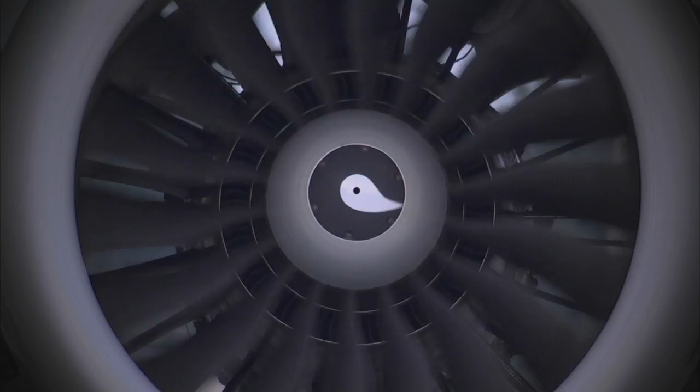The aircraft of today are quieter, more efficient and stronger than anyone could have imagined, even a few short years ago. Of course, future aircraft will continue this trend and become even more efficient and dependable, reaching unimaginable goals that today's aircraft could never reach.

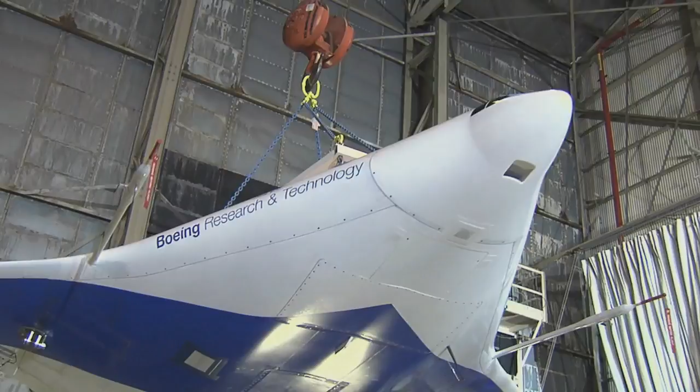But how will they reach these goals, and who is performing the important work to change the way we all fly? The common misconception is that most advances come strictly from major aircraft manufacturers. But the true story is much more complex. Unknown to most of the public is that one of the unsung leaders in aviation is NASA.

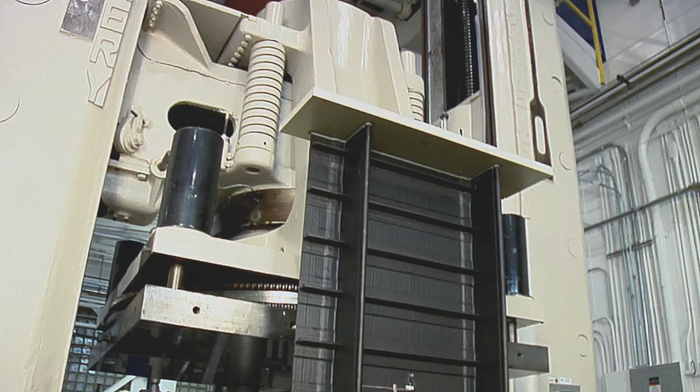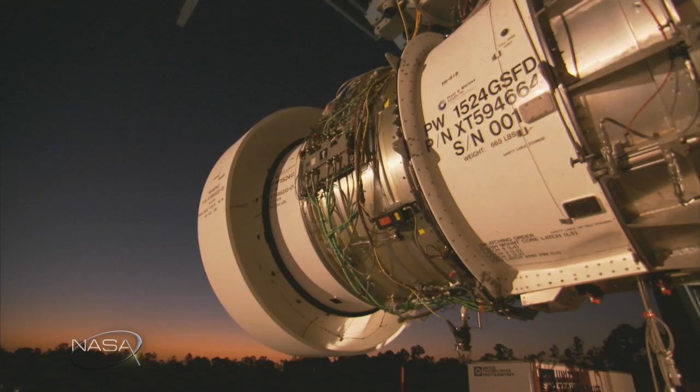NASA engineers work hand in hand with industry partners, developing and testing new designs to make aircraft safer, greener, and much more efficient. On this episode of NASA X, we will look at how this collaboration works, and we'll see how NASA and industry are paving the way for greener, safer aircraft for today and for aircraft of the future as well.

This is a familiar sight for modern travellers. Large metal jets roaring down the runway and lifting into the air. In fact, this sight really hasn't changed that much in the last 50 years or so. Other than the way most people dressed for flights back then, the basic concept of air travel is pretty much the same.

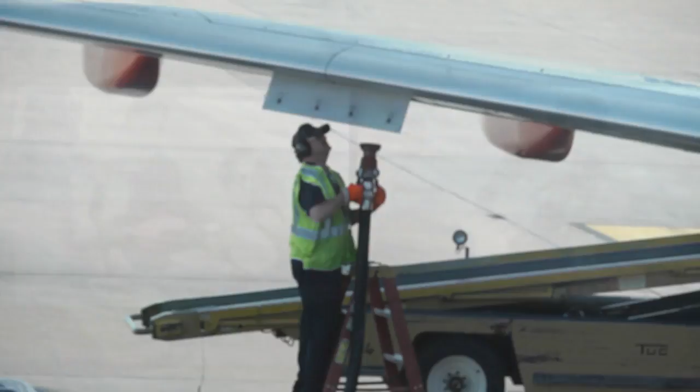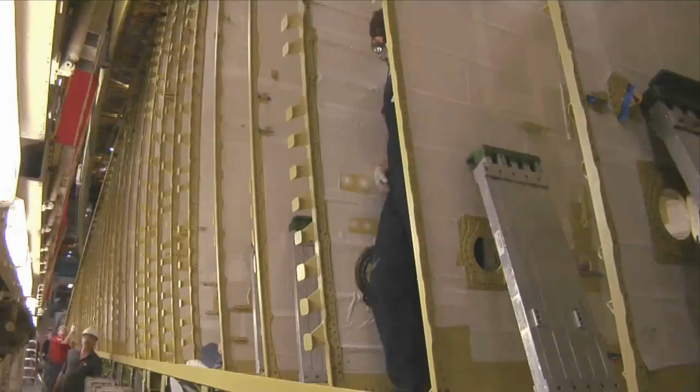There have, of course, been measurable differences in fuel economy, with new developments in engine design and noise reduction techniques. But the basic tube and wing shape and the material used to build these aircraft has remained pretty much the same for years. But that isn't the case anymore.

Like so many products that have evolved dramatically in the last few decades, like phones for example, the same is true for aircraft design. Today more than ever, researchers are pushing the boundaries of the science of flight in their effort to make aircraft of the future more efficient, quieter and greener. So who's taking the lead and why?

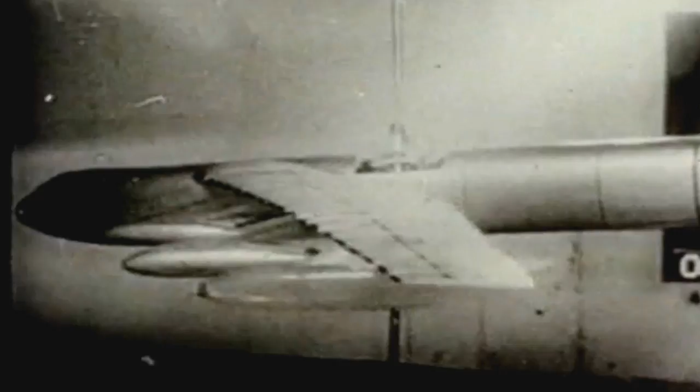Obviously industry is taking the lead in some areas because cleaner operations and more efficiency mean higher profits. But they're just not the only players. One of the leading innovators in aeronautics over the history of flight has been and continues to be NASA.

The push to modernise and change aircraft of the future is being led by NASA's Environmentally Responsible Aviation Project, or ERA. The ERA project is putting its money where its mouth is with tough but reachable goals to make big changes in how we fly by the year 2025.

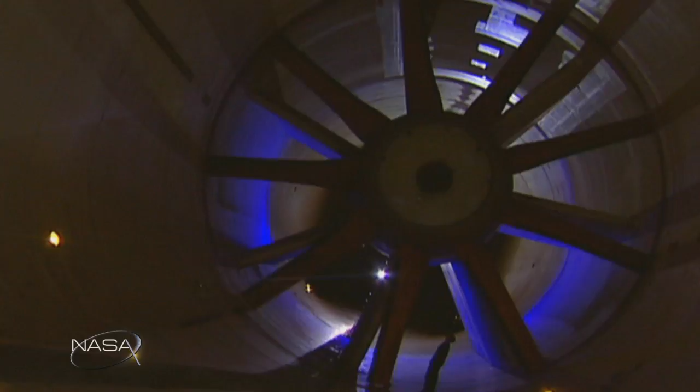So the Environmentally Responsible Aviation Project is a 5-year, 6-year project, and it's focused on advanced aircraft design and the technologies that are needed to enable them. The main goal of the project is to reduce noise, to reduce mission fuel burn, and to reduce LTO NOx emissions. And LTO stands for landing takeoff, oxides of nitrogen emissions.

And we want to do that simultaneously, and that's never been done before, where we looked at some very difficult metrics and tried to push all of those metrics down simultaneously. And so over this 5 or 6 years, we'll be looking at technologies, we'll be looking at aircraft designs and the combination of those to end up with a configuration that could simultaneously attack these goals.

So how do you make these goals a reality? The 4 basic principles of flight are lift, drag, weight, and thrust. Finding efficiency in each of these basic principles will help reach NASA's stated goals. Let's look at weight first. Obviously, if you can reduce the weight of an aircraft, then you will burn less fuel and therefore become more efficient. Airlines are always looking for ways to carry less weight.

You can see that in extra baggage fees, reduction of heavy items such as ovens and heavy carts on some planes. And in one of the most drastic measures taken in recent years, some airlines have begun asking passengers to use the bathroom in the terminal before getting on the plane, making the passengers a little lighter.

In a 1-month experiment, an airline found that they reduced greenhouse gas by 5 tons simply by asking passengers to use the loo ahead of time. This proves that even small changes in the weight of an aircraft can add up to big long-term benefits. The holy grail, of course, is to make the entire aircraft structure lighter.

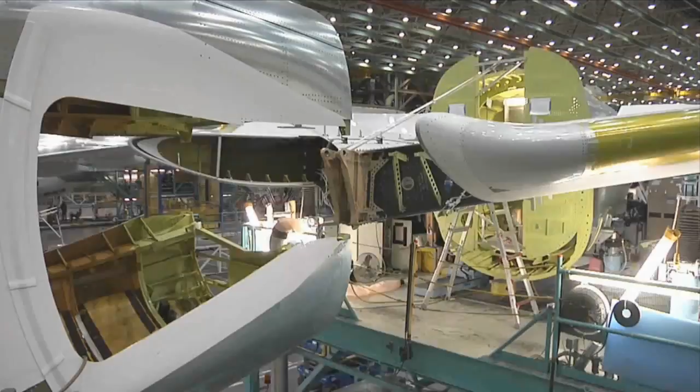So how can this be done? Today's aircraft are made out of metals that are safe, but that are also very heavy. So is there an alternative? In recent decades, NASA and its industry partners have been working hard developing new materials that could bring aircraft out of the 20th century and into the future.

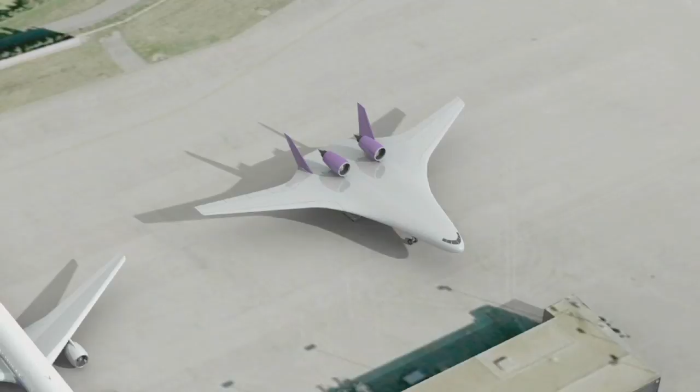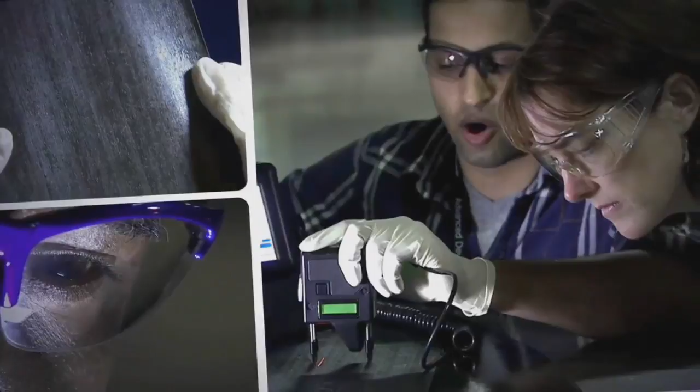New composite materials are leading the charge to replace conventional metals. Aircraft designers are taking advantage of composite materials' lightweight, strength, and flexibility. Aircraft designers have long known about these qualities and have been using something called carbon epoxy composite materials in small quantities for decades.

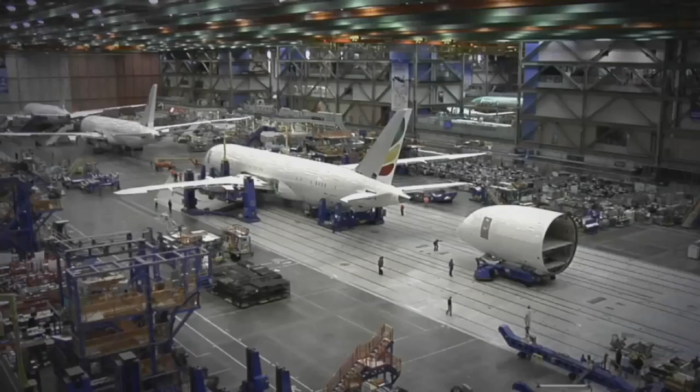After years of research and validation of composites for flight, the Boeing company was the first to step up and build an aircraft almost completely out of composite materials. Called the 787, this next-generation aircraft first came into service in October of 2011. As the first official commercial flight of the 787 took off from Tokyo that year, it was clear that this concept of an all-composite aircraft was here to stay.

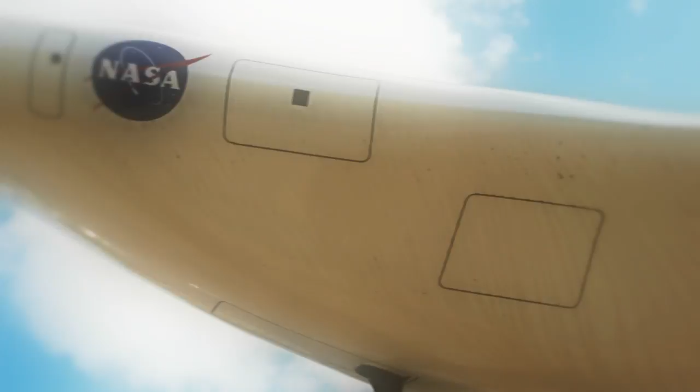NASA is not in the business of building aircraft, but they are in the business of helping lead development programs to move the science of flight along. Once validation and testing in the development process is complete, NASA shares its findings with industry in an attempt to help further research and development.

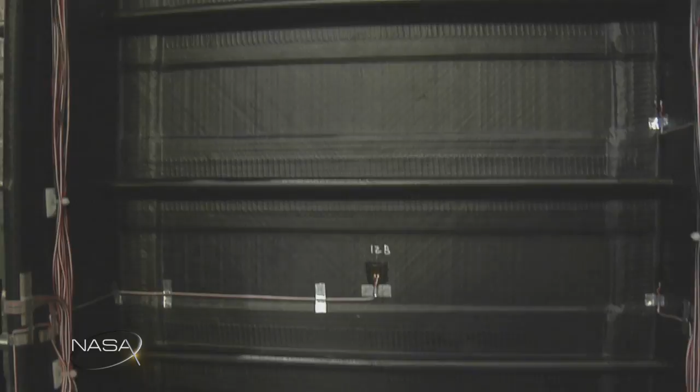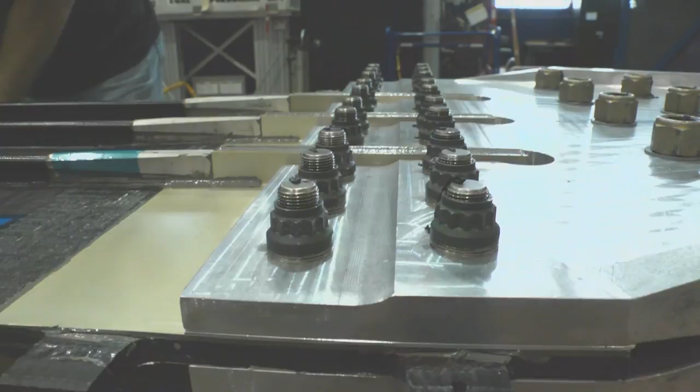One of the programs in which NASA is working with industry is in the development of new composite materials for aircraft. Here in the Structures and Materials Lab in Building 1148 at NASA Langley Research Center, much of the development of next-generation composites for use in aircraft is taking shape. Called PRSEUS, this new idea has the potential to completely rewrite how composites for use in aircraft are made.

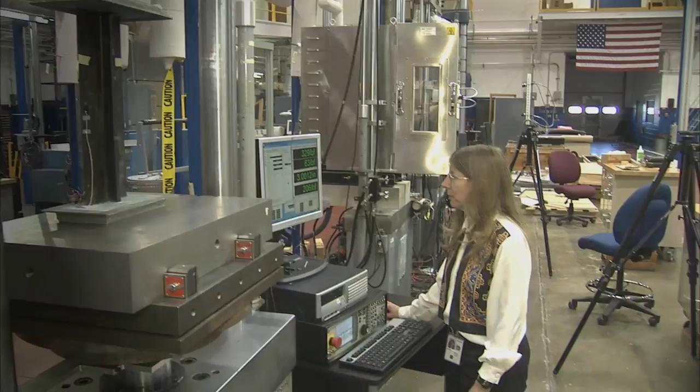Leading much of the research for NASA's Environmentally Responsible Aviation program in the composite field is NASA Langley's Dawn Jegley. This MIT grad has been working with these materials for decades and has a keen understanding of what needs to be done to make these composites of the future fly.

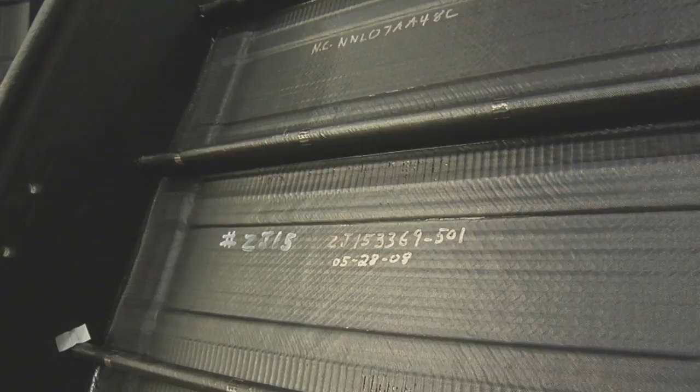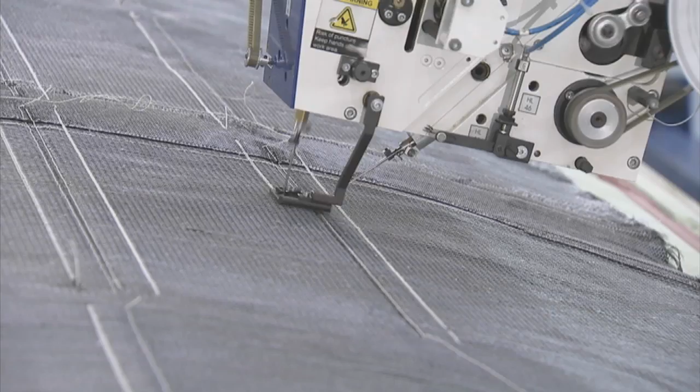PRSEUS stands for Pultruded Rod Stitched Efficient Unitized Structure. And what that means is that we have a graphite epoxy or a carbon epoxy structure, and what we have is pultruded rods inside carbon layers. We have a carbon skin, and we have stitches that run through the thickness that holds the whole thing together. One of the huge benefits associated with PRSEUS is its revolutionary stitching technique.

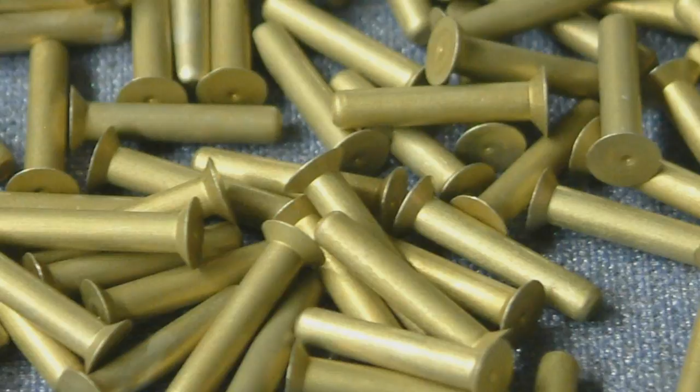On current metal and composite aircraft, one of the key components used to hold the vehicle together are the fasteners, like rivets or bolts. Although these are effective, one major drawback is that quite a few holes have to be drilled into each piece where the fasteners will be added. Not only is that labour intensive, but each hole represents a place where damage or a crack could start. But the stitching prevents that from happening.

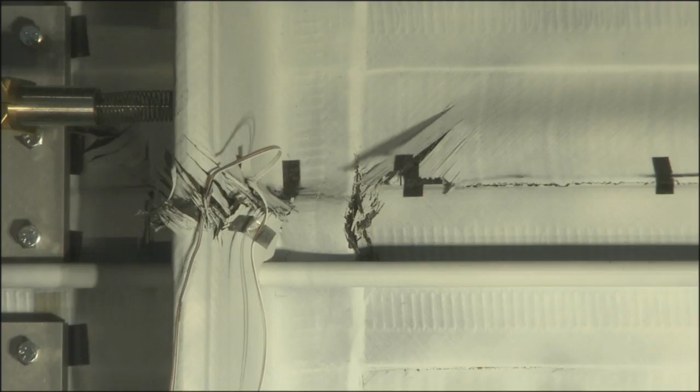We found that if you have a crack and it grows to a certain point and it gets to some place that it's stitched, that crack will turn. So instead of going through the stitching, it will turn, and that's a good thing because in flight you would rather not have a crack grow all the way around a wing.

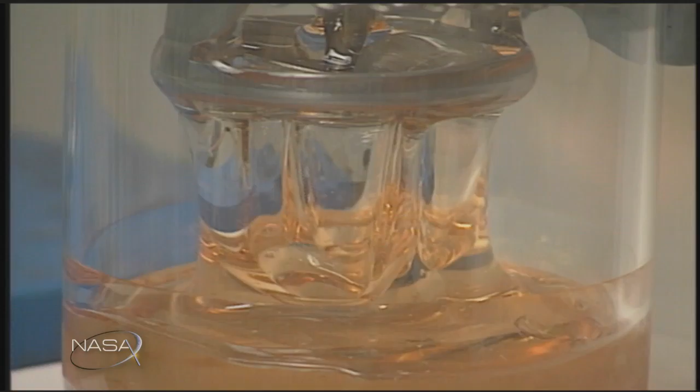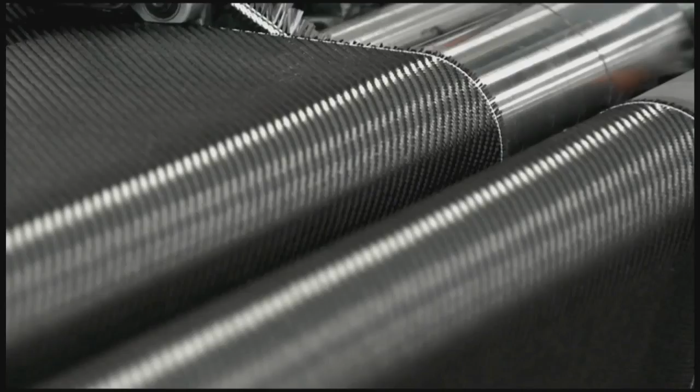When you look at a piece of carbon epoxy composite material, it honestly doesn't look very strong in its raw form. But once it is in its final state, it can be much stronger than metals. You start out with a fabric. It looks kind of like carpeting. And you roll that out into the shape that you're looking for, and you position all the different parts of your structure where you want them, and then you come through with a stitching machine.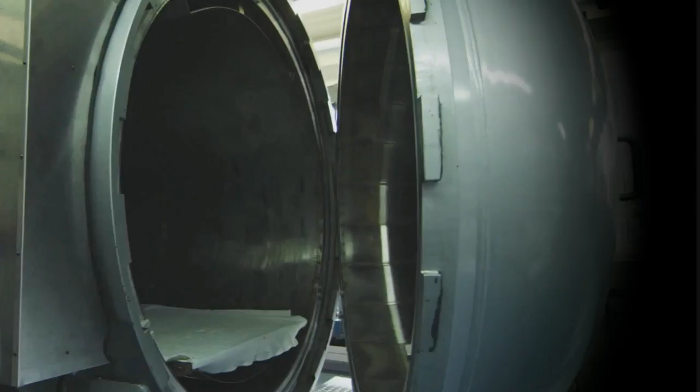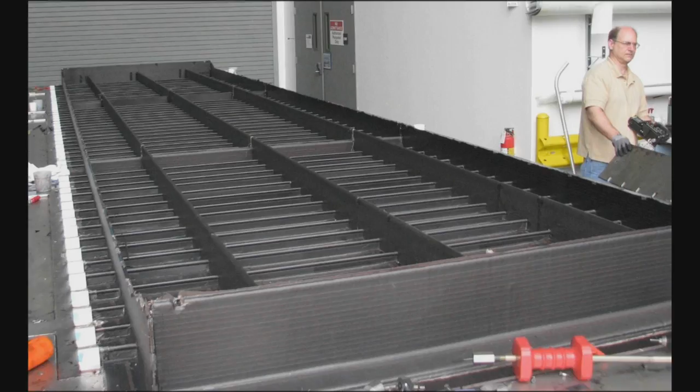After you've stitched the whole thing together, the panel goes into an oven. It's infused with epoxy. We heat it up, and then we get everything just the way we want it, and then we cool the structure. So what happens is you end up with a piece of material, could be a very large piece of material, which is now stiff and strong and just in the right shape that you want it.

Another key component to carbon epoxy composite materials is that they can be tailored to be much stronger than metal. At the molecular level, the properties of metal are isotropic, which means that the properties all run in the same direction. Because of this feature, aircraft designs are very bulky in some areas to provide stiffness, making a craft much heavier. But with composites, you are starting with fibers which are very strong, tough threads, and you can position those threads in any direction you want.

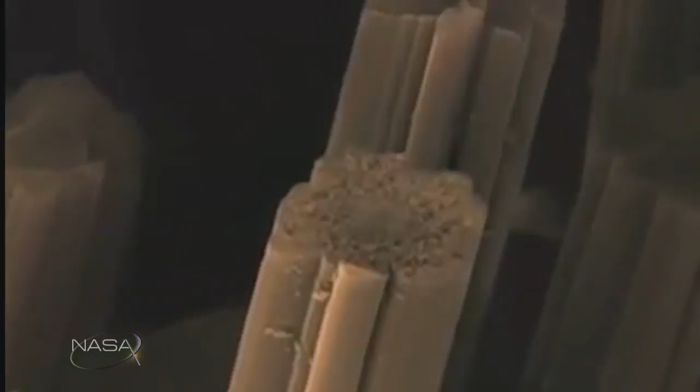For example, if there is an area on the aircraft that takes a lot of load, the designers can place the fibers in that direction, providing enormous strength, but while also using much less material and weight than metal aircraft.

Of course, validating that the pieces will work is a major component of the development stage. So I know that NASA really does some great testing of its materials before they go onto any aircraft. How are you testing PRSEUS at the moment?

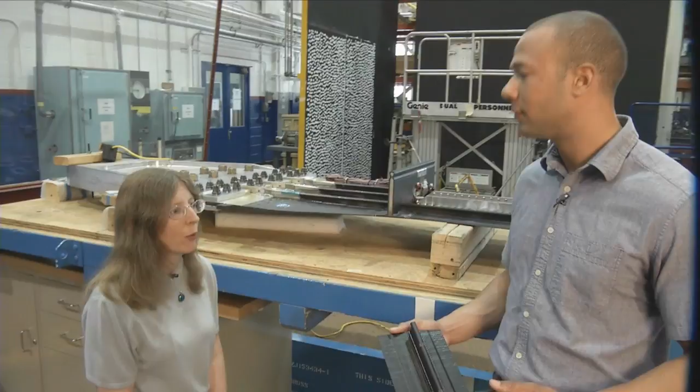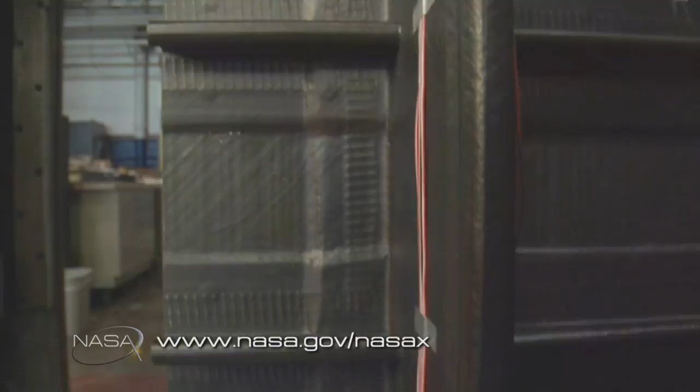One of NASA's goals is to develop technology for future aircraft. When we're developing a new structure, one of the things we need to do is fully understand how it's going to behave. And to do that, we start by looking at very small pieces, and then we move up slowly to very large pieces until we get to a full-scale part of an aircraft.

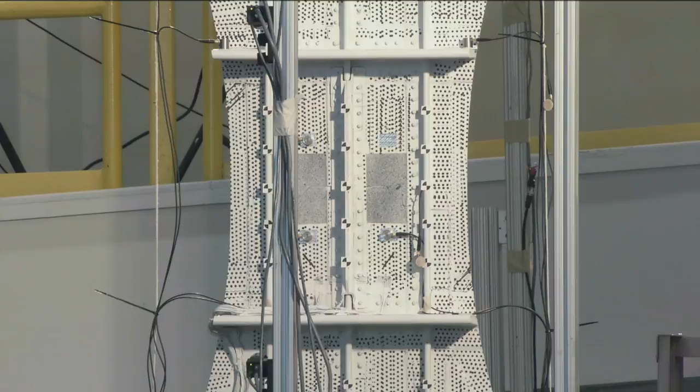And then when we understand that, we go to the next stage, which might be something more like this, where we have what we call a built-up structure. So we have a skin, and then we have a stiffener on it. And then we can apply a load. We might push on it, we might pull on it, we might bend it to look at how that behaves.

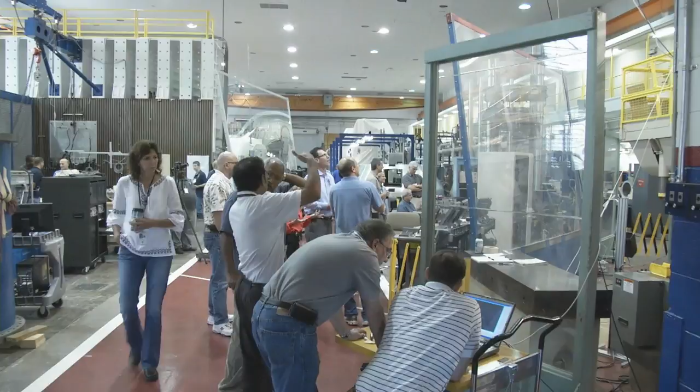And all the while we're doing this, we're doing analytical studies to make sure we understand and can predict how it's going to behave. Because if we don't predict it properly, then we feel we don't really understand it well enough, and we have to take a step back and figure out what it is we're missing. We have many facilities around the center here that we use for doing those kind of tests.

Well, Dawn, thanks so much for talking to us today about PRSEUS. This looks like an amazing technology, and you're doing a fantastic job. Thank you so much. Thank you.

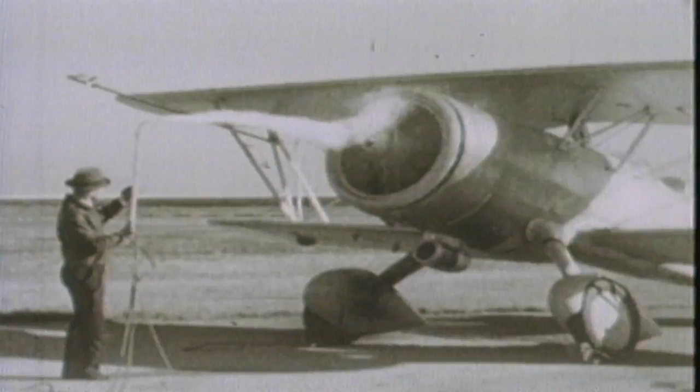Up next, let's look at another of the basic principles of flight: thrust. Since the earliest days of flight, engineers have looked for ways to make the engines we use on aircraft more powerful and efficient. One of the most important early engines was the 1903 Wright brothers design that was used for their very first flight at Kitty Hawk. It only produced about 12 horsepower, but it opened the door for all aircraft engines to come.

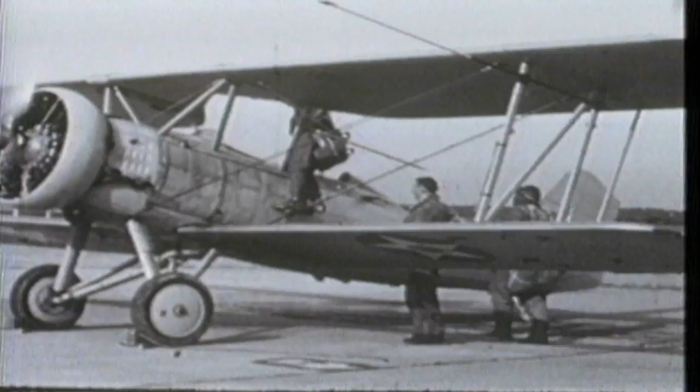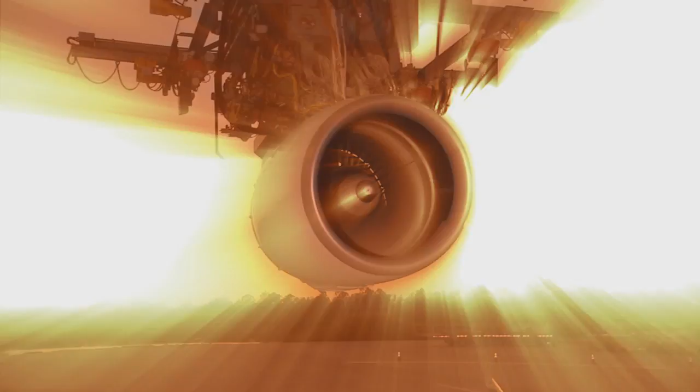Since that time, there has been a steady progression in the development of engine technology, from the relatively simple propellers of the past to the incredibly advanced jet propulsors of today. Engines have never been better, but although current engines are already very efficient, quiet, and relatively green, they pale in comparison to what the next generation of engine technology will be.

To help understand how engine technology is improving, let's first take a look at how a basic turbofan engine works. Incoming air is captured in the engine inlet. Some of the air passes through the fan and into the compressor and burner, where it is mixed with fuel for combustion. The hot exhaust passes through the core and fan turbines and then out of the nozzle. The rest of the incoming air passes through the fan and bypasses or goes around the engine. So a turbofan gets some of its thrust from the core and some of its thrust from the fan.

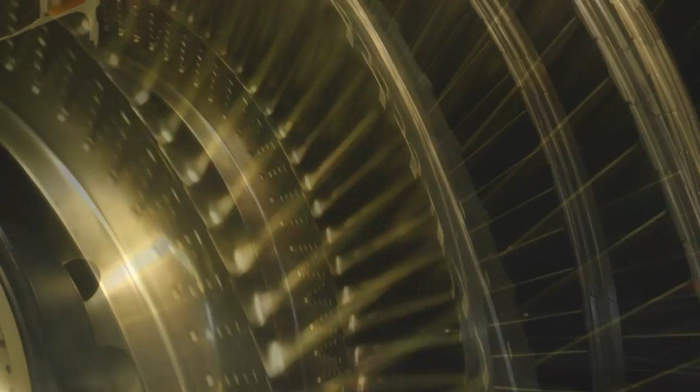The ratio of the air that goes around the engine to the air that goes through the core is called the bypass ratio. Many engines today have a bypass ratio of roughly around 5:1. Engineers have known for many years that if they could increase the bypass ratio, then the engine would become much more efficient. But the trouble with increasing the bypass means that the size of the engine would have to grow, making it heavier and also unable to fit under the wings of most planes.

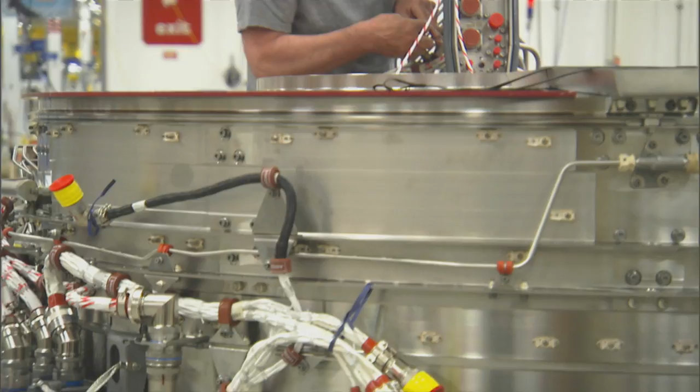So, what to do? Over the past 20 years or so, NASA and industry have been working on a solution that would create ultra-high bypass engines while also addressing the stated problems of size and weight.

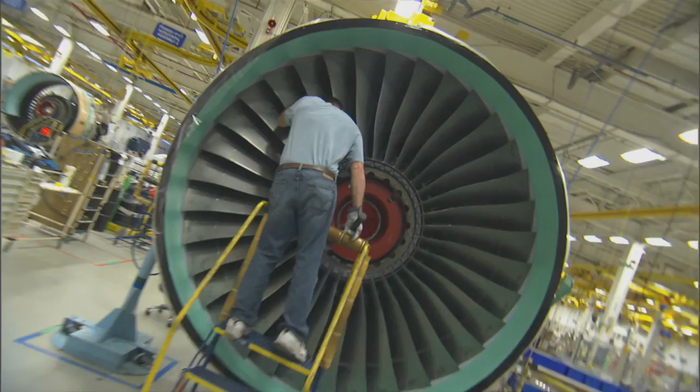Today, a new engine designed in collaboration with Pratt & Whitney and NASA has been developed that will more than double the bypass of current engines. This new engine design has taken many years of research and development just to get to the point where we are today, because three key pieces of technology needed to be created that didn't exist: a new gearing system, an ultra-efficient fan, and a more efficient nacelle.

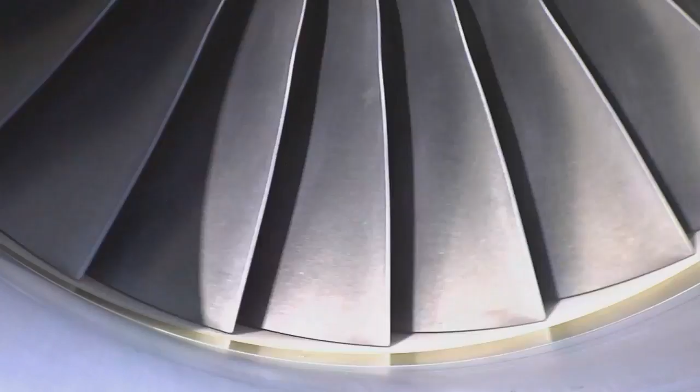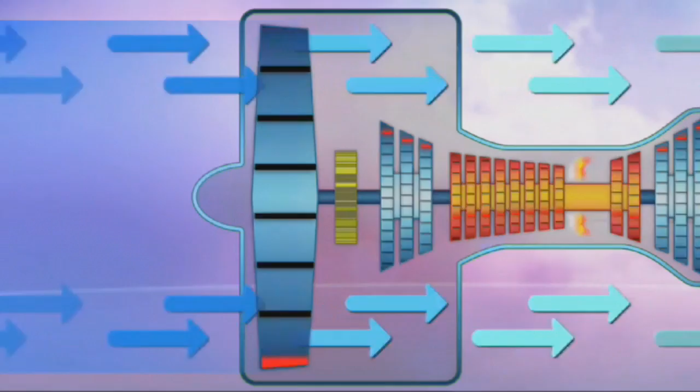Although each of these were difficult to perfect, one of the most challenging was the gearing system for the turbofan. This is because there is a paradox in engine design. The slower the big fan at the front moves, the more efficient it is. But the turbines at the back have to move at a very high rate of speed to work efficiently. Hence the paradox. In order to have the slow-moving fan at the front and the fast-moving fans at the back working together, a revolutionary gear system had to be developed that could allow both of these parts to work together optimally.

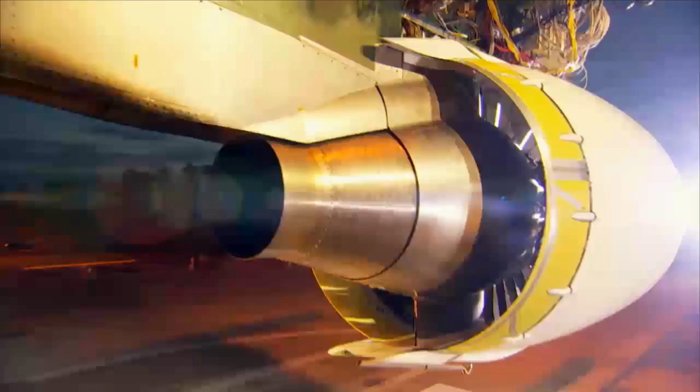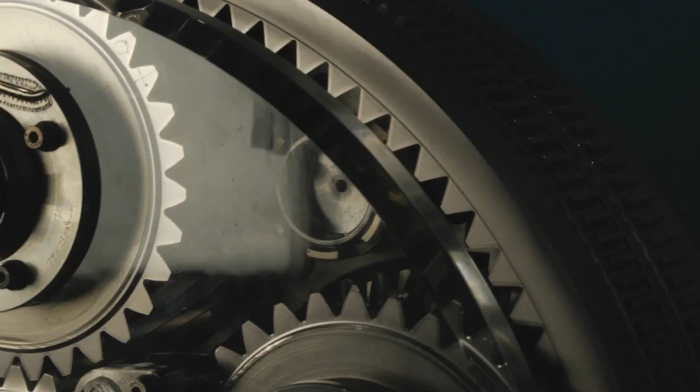So what the gear lets me do is shrink the core engine that makes the power to a large degree. It makes it lighter, takes a couple of thousand parts out, and it means I can replace some very rare super alloys with some more common gear steel. We always knew you could do that, but you need a gear that's way over 99% efficient. We're talking about 25,000, 30,000 horsepower gears.

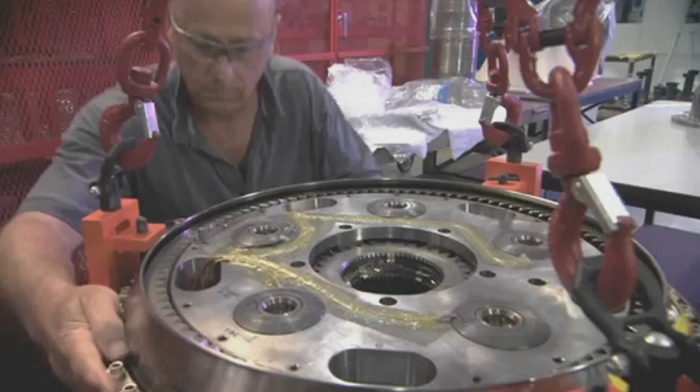A naval ship has that sort of power, and the gear is the size of a small house. We had to develop a gear that's the size of a small automobile wheel, not a house, and it has to last 20 years without maintenance, and it has to be super efficient. And so we've been working on this for at least 20 years.

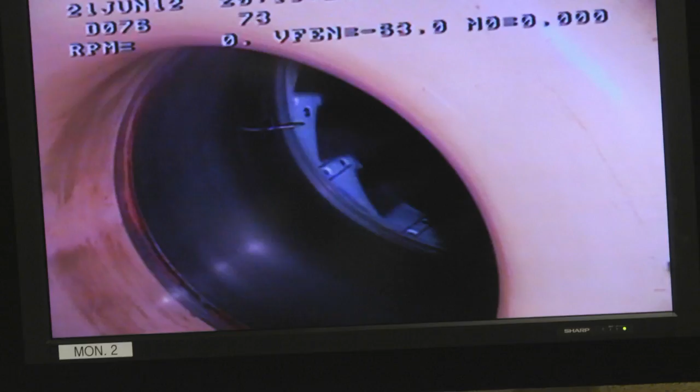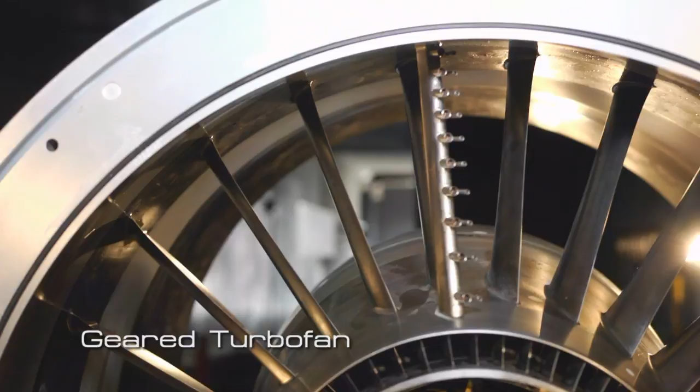Much of the testing for this engine has in fact come at NASA laboratories. NASA's unique facilities and subject matter experts have helped the Pratt & Whitney team to understand how to configure the ultra-high bypass engine. So this is an example of the ultra-high bypass engine from Pratt & Whitney called the geared turbofan. This particular engine has a bypass ratio of up to 12:1, which means 12 times the amount of air goes through this part of it than goes through this part.

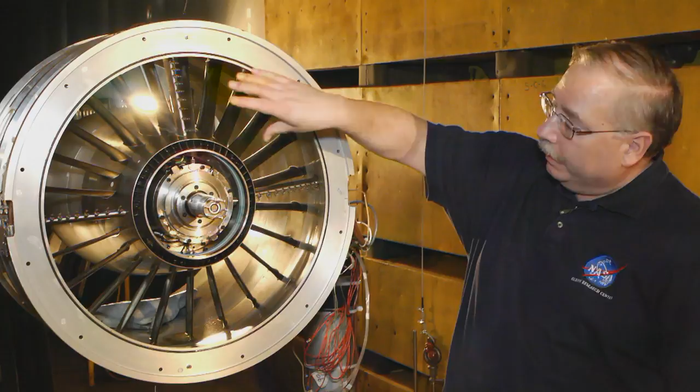This is the core, or the engine part. This is the bypass part. In this particular engine, all the thrust is generated in this part, and we've removed the fans so that you can see how small the engine airflow is compared to the overall flow. So why do we want to do this?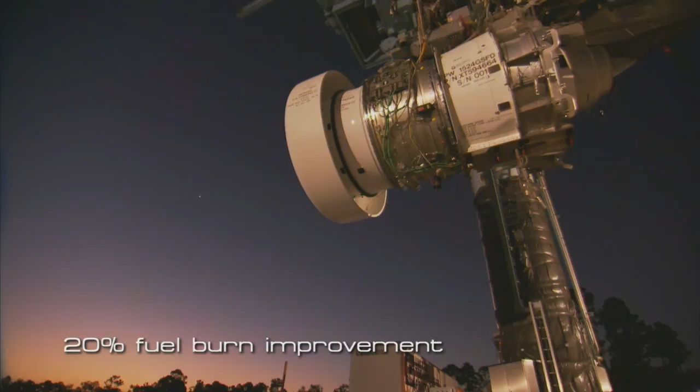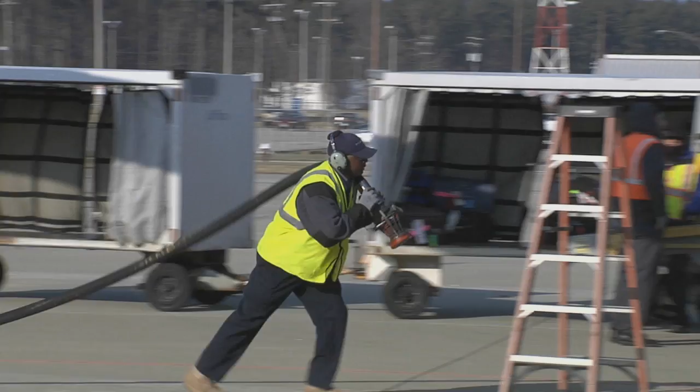Well, this particular design, especially the one Pratt & Whitney is working on called the geared turbofan, has the potential of having as much as 20% better fuel burn than a regular jet engine today. And the reason they can do that is because the more air that you can put up here, the more efficient the engine is and the better the fuel economy. Because fuel costs have spiraled out of control in recent years, the fuel efficiency of this engine could be a game changer for the aircraft industry.

The people who care are not so much Airbus, but their customers, the airlines. So an A320 with these engines on compared to the current engines will save $200 to $400 an hour, on the order of $1.5 million to $2.5 million a year reduced fuel costs, depending upon the cost of fuel, typically. So it's worth millions per year for the airlines. That doesn't mean they still won't charge you for the extra bag, though.

Of course, fuel economy is not the only huge benefit to this engine. Its noise reduction capability is truly astounding. On a typical jet aircraft, the fans at the front are moving at more than the speed of sound, making them very noisy. But because this new engine's forward fans move slower, they now make much, much less noise. They are really quiet. And how quiet is really quiet?

For a 737-sized airplane, 150-passenger airplane, the area that hears objectionable noise on the ground is reduced by about 3/4. Almost to the NASA goal, which is to keep it in the airport.

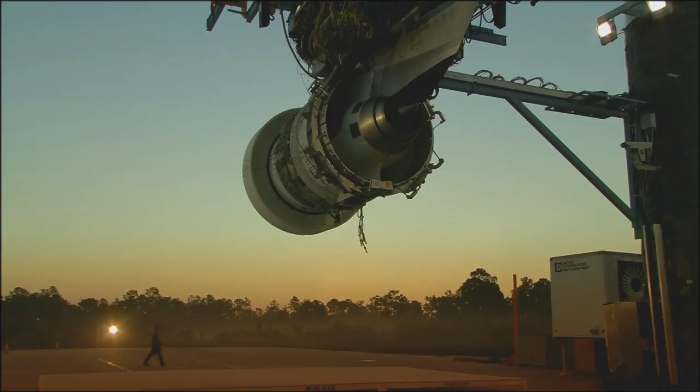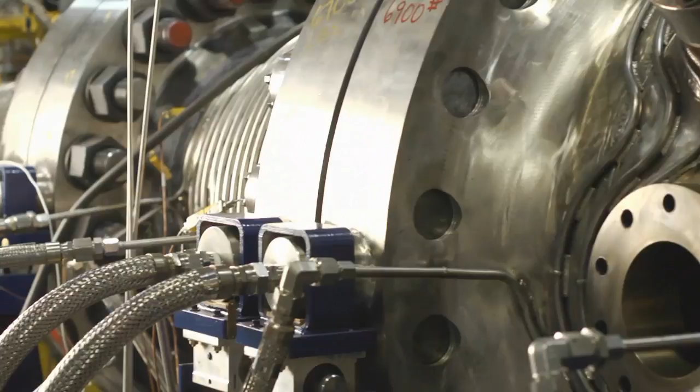Another key component in the testing chain of the entire engine happens here at NASA Glenn, in the Advanced Subsonic Combustion Rig, or ASCR. This facility is the only one in the country that allows real-time, real-world testing conditions for engine combustors. This is the Advanced Subsonic Combustor Rig. It's really one of the unique facilities in the U.S. which enables us to test combustors and gas turbine engines at realistic conditions that they would see in a gas turbine engine flying in today's aircraft and even those in the next 20 years from now.

The real beauty of this rig is it allows us to operate pretty much over the whole flight regime. So we can map out what the emissions are near the ground during idle and takeoff conditions, but also on approach and landing. In addition, even at cruise, because we're also becoming more and more concerned about emissions in the atmosphere and what that does to our environment.

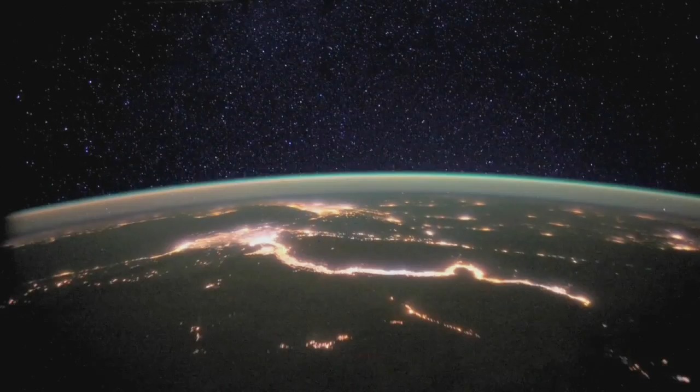The environment is one of the key components in much of the work going on now. NASA and industry realize that good stewardship is not only beneficial to the planet, but can be a good business model too. The work that is coming out of this program is looking at both fuel-flexible applications as well as strictly environmental concerns. Our geared turbofan is 15% more efficient and can run on a wide range of fuels. In fact, we're some of the leaders working with the industry in the development of biofuels.

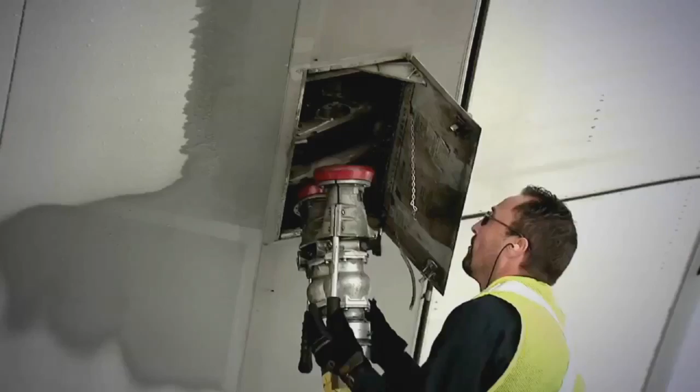Of course, testing for these new engines is not only happening at NASA, but can also be seen on a unique airplane owned by Pratt & Whitney. Pratt & Whitney actually owns two 747 airplanes that we do testing on. There are 4 engines on a 747. We'll actually take one of the existing JT9Ds off, which is a Pratt & Whitney made engine that powers 747s, and we'll in some cases replace that engine with one of our test engines. So we'll run the airplane on 4 engines, 3 of which are currently certified on the airplane, the 4th being the experimental.

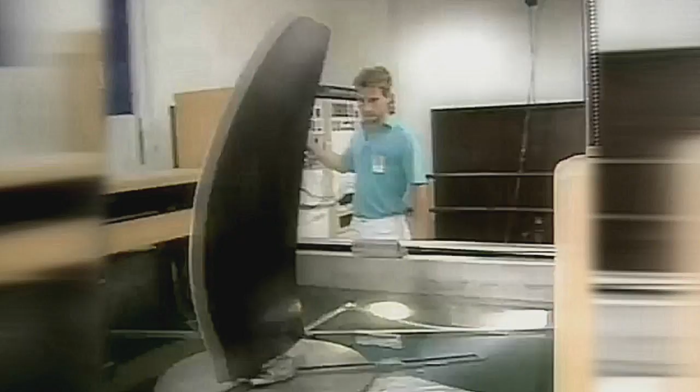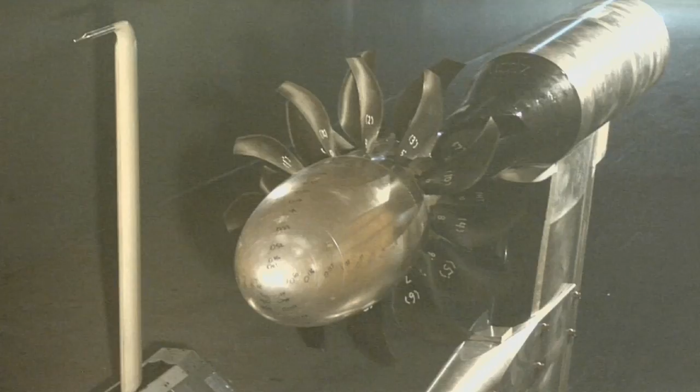Of course, this new geared turbofan is not the only game in town. NASA has also taken a look back at some older technology, including a concept called the open rotor that also shows much promise. So here at NASA, we're working on the next generation of engine technologies, both ducted engines like the geared turbofan and unducted engines like open rotors. We recently finished a series of tests with General Electric and the Federal Aviation Administration on open rotors, looking at these technologies to reduce fuel burn and improve the acoustic performance of these next generation engines.

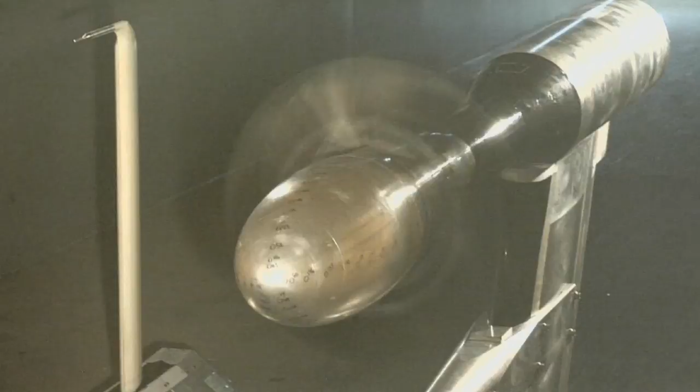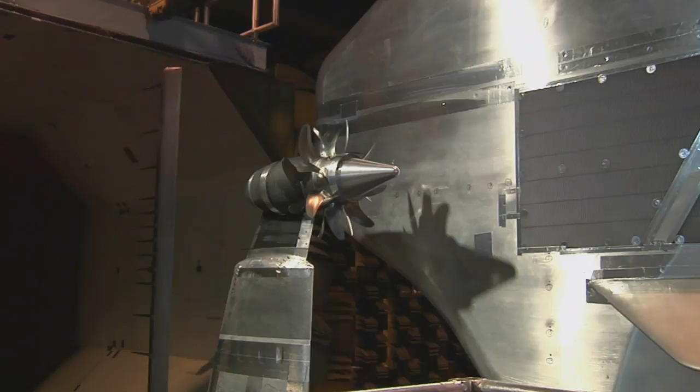So as you try to go to higher and higher bypass ratio engines, the fans keep getting larger and larger in diameter, and at some point it just makes sense to get rid of the cowling and go with what essentially looks like a propeller. The difference is that these are very specialized high-speed propellers, so that an open rotor powered aircraft would be able to fly at essentially the same speed as an aircraft with a jet engine.

In the past, the open rotor concept had been promising, but the major drawback was the noise. Thanks to the advent of modern computational fluid dynamics, NASA and industry engineers have been able to redesign the blades for these open rotors and make them much, much quieter. The system studies that NASA's done have shown that for single-aisle aircraft, if we built an open rotor engine today and put it on an aircraft, it would probably be quieter than most of the aircraft flying right now. So we've come a long, long way in solving the acoustics issues that were part of the original unducted rotor program.

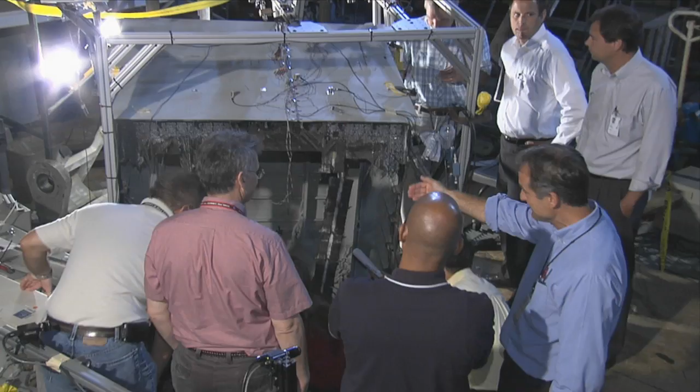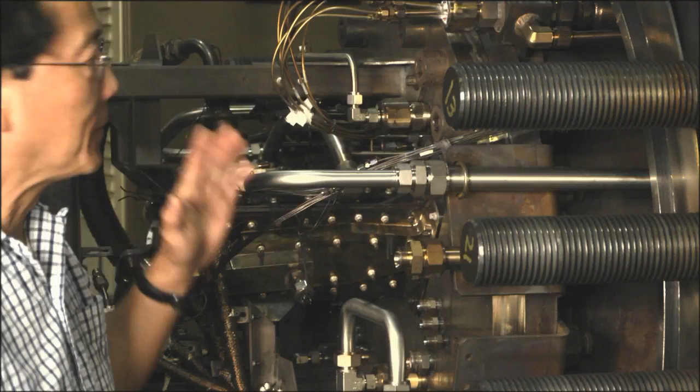So, there you have it. NASA's ERA program and industry are truly changing the way we all fly. NASA is pushing the industry hard to make these changes see the light of day, and industry is responding with truly innovative and groundbreaking technologies. With this type of collaboration and work ethic, there's no doubt the world will soon see a dramatic difference in the way we all fly.